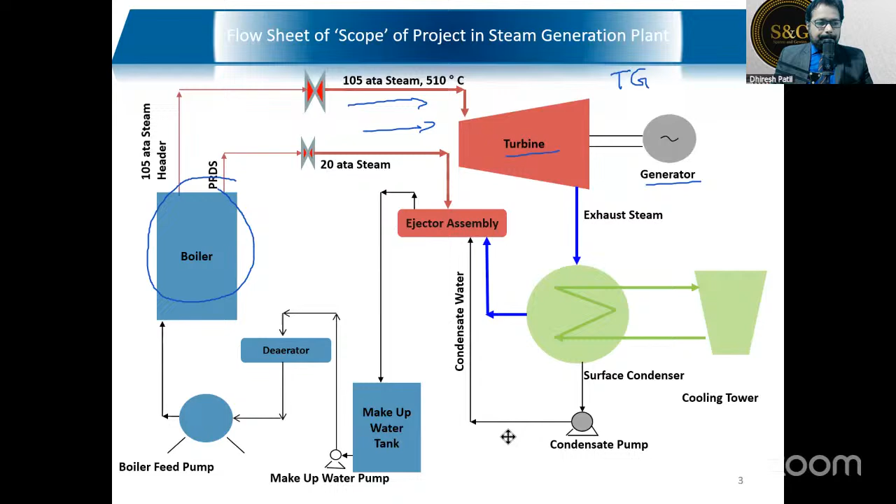Okay, now once you understand this, then we go to this. What is the tool? Now you got to see. You may not understand the main core domain specific knowledge, but you have to identify the tool. Okay everybody, what is the name of the tool? Type in the chat box.

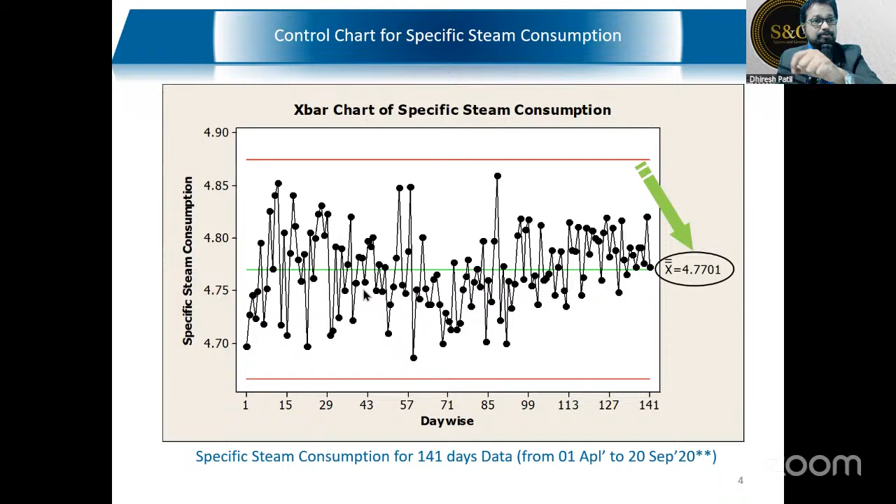Now, how did they get 4.77 metric ton? From this diagram, from this actual data. This is called the 4.77 average daily specific steam consumption. They have taken this data from there and defined their problem that 4.77 is the current specific steam consumption.

In this umbrella, they have selected this particular pie, which is the specific steam consumption of the turbo generator. So they have taken the target from 4.77 to 4.65. Are you clear till now? Just type yes in the chat box.

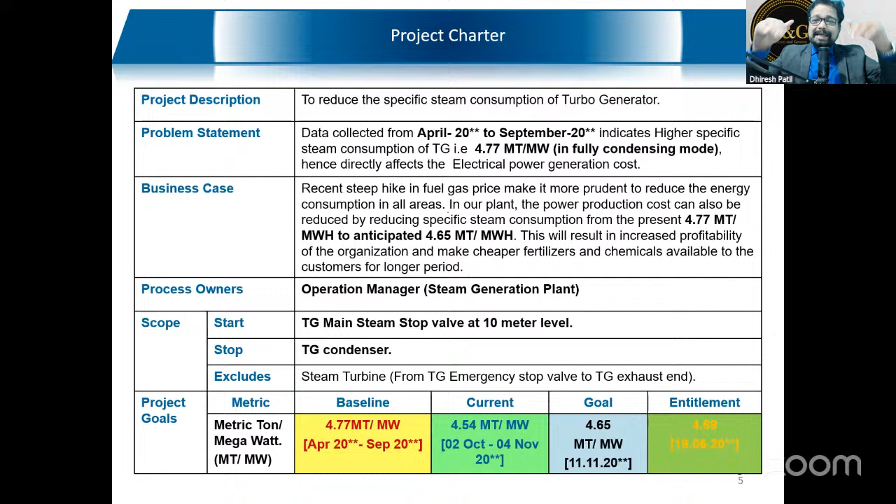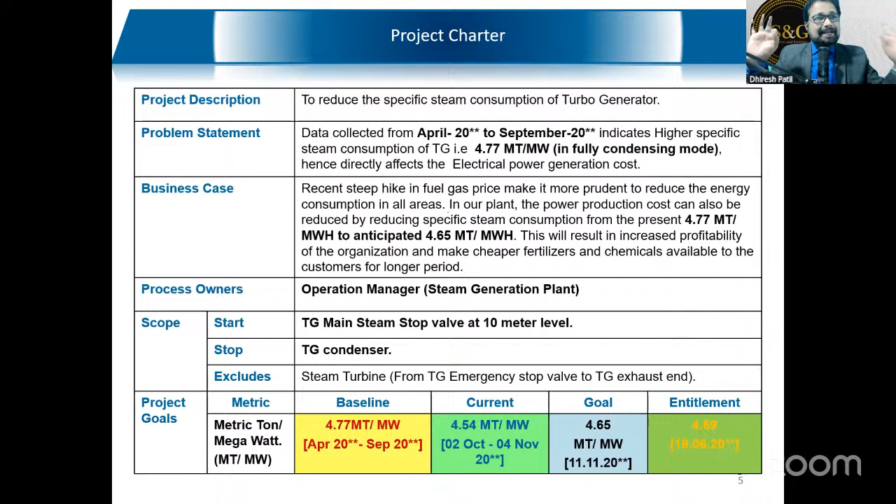We need not understand deeper into this. Just understand the tools, basic tools, and overall what project we are talking about here. That basic understanding is more than enough for us. Clear? Super. Now this is the potential saving of the project.

Now every project's potential saving has to be calculated on a per annum basis. Make a note of this. Write this down in your notepad. Any project's potential saving has to be calculated on a per annum basis, not per month basis etc. Not per quarter, not per month basis.

Clear? And this has to be validated from the finance head. Are you clear with these two points? So the potential saving has to be calculated in an annualized format per annum. Why? So that the top management can understand what is the cost for the project and what is the financial impact we are getting. Decision making becomes easier, resource allocation becomes easier, focus becomes easier.

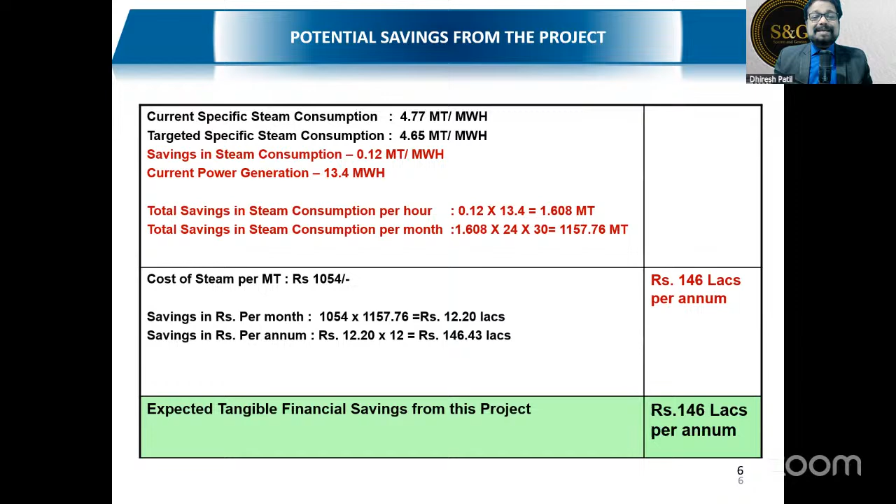Now in some cases, direct potential saving may not be possible, and that is okay. Every project may not be a cost saving project or there may not be some financial impact. I will speak about it. Now, what is this tool?

This is one of the most brilliant tools I have come across to gauge the engagement level of people, because it's a very tough job. You cannot gauge the engagement level of people because people speak something, but their actions speak something else, right? That's why this becomes very important for us to gauge the current engagement level of people.

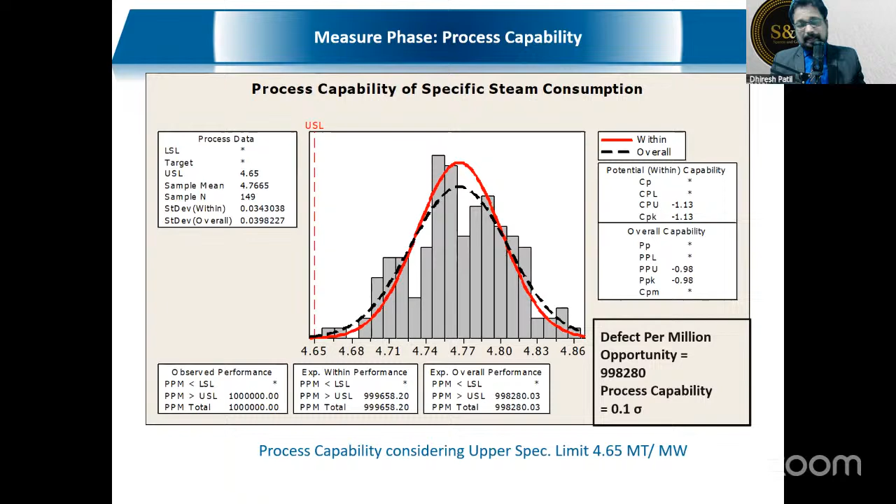So this is called process capability analysis. Then we go to the analyze phase. What is this tool called? Type in the chat box, everybody - what is this tool called? Very simple, it's fishbone analysis - man, machine, method, mother nature, material, measurement. All these are fishbone, Ishikawa, the 6 M's.

So why high specific steam consumption? These are various causes they have identified. This has been followed by why analysis, or root cause analysis. So this is a tabular format of why analysis, correct?

So let's say, for example, loss of heat through insulation. Why has there been loss of heat? Because of improper application of insulation material - while applying the material, it was not applied properly, so not good workmanship. Workmanship was not proper because the manpower is not trained enough to do this - so this is the root cause. Then deterioration of the insulation, no periodic inspection, no provision of checking points available - so point not provided is the root cause.

So these yellow colored ones are the root causes taken into the final column, which is called potential root cause. Clear, everybody? So this is called root cause analysis, RCA.

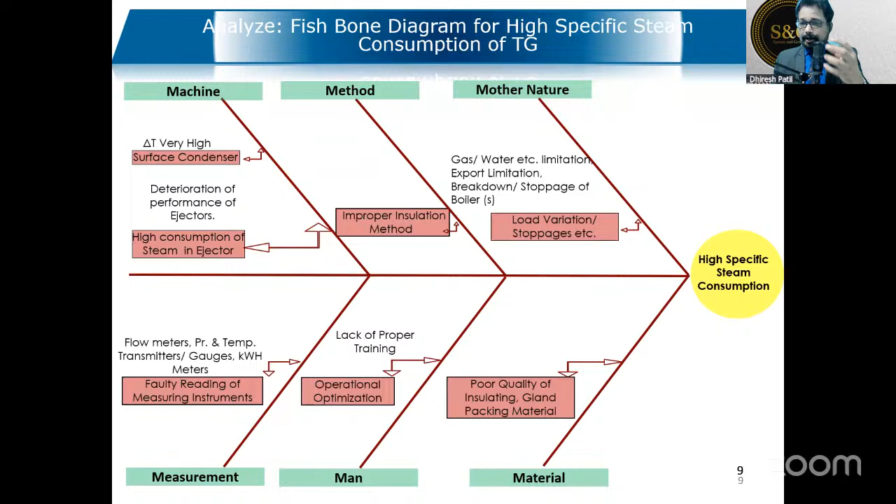Now, which phase are we in? Type in the chat box - which phase are we in? Type in the chat box everybody - which phase of DMAIC are we in?

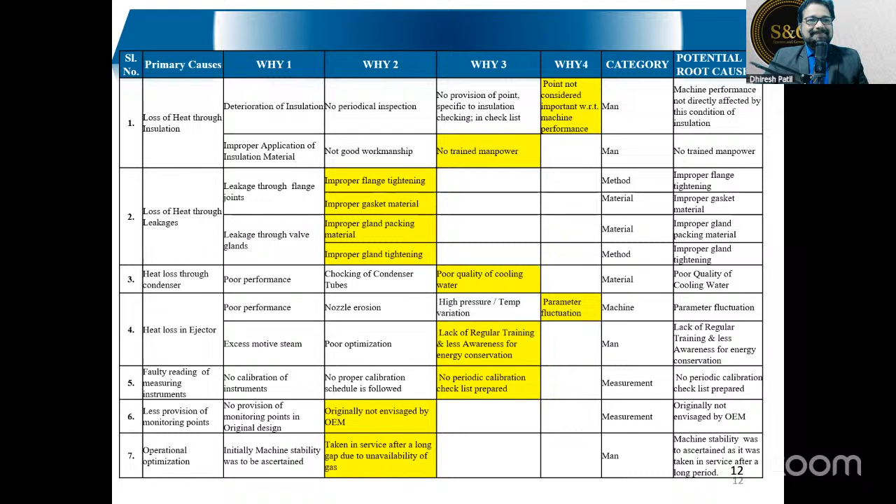Fantastic, so we are in the analyze phase. Every time you should remember which phase we are in. Project charter, we are in the define phase. Stakeholder analysis, we are in the define phase. Process capability analysis, we are in the measure phase. Fishbone analysis, root cause analysis, we are in the analyze phase. So we have to remember the sequence, and it will take some time for you to clear this.

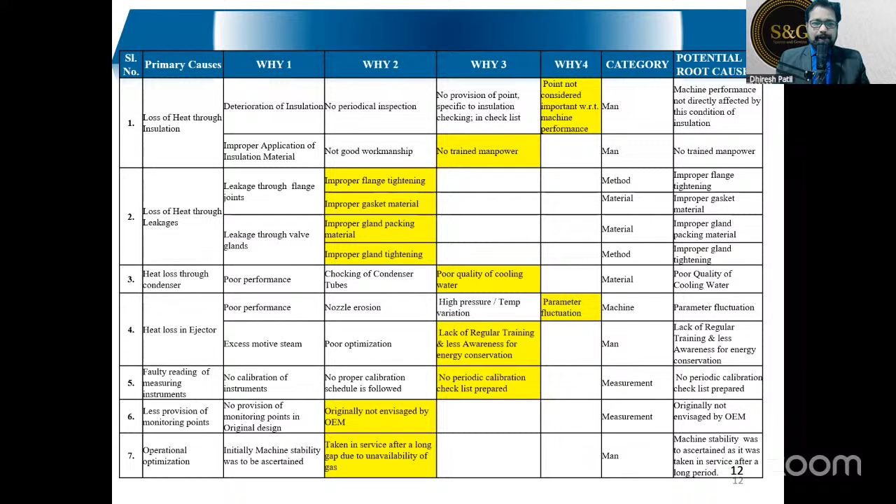Once this is clear completely, then you will be more confident about these tools. After the root cause analysis is done, there is something called root cause prioritization, where in this particular project they have done severity, occurrence, and detection. This is similar to something called FMEA, which is failure mode and effect analysis.

Everybody please type FMEA in the chat box. This is not actually FMEA, but it is based on a similar kind of FMEA program. FMEA, what is that? Let me write here. FMEA, which is failure mode and effect analysis.

Fantastic, very good. Now in this, you have severity, occurrence, and detection scoring, and then we have the RPN, which is risk priority number. We multiply these 3 scores, and whatever is the highest RPN, risk priority number, is our very top important most root causes on which we will identify the solutions. Clear? This is one way of identifying the priority solutions we have to find out.

So generally what we do is, any RPN number going beyond more than 125, we consider as a critical or important RPN number, and important cause. So those causes we have to find solutions for. What is the logic behind 125? It is a multiplication of 5 into 5 into 5, which is 125. So anything less than 125, we can consider fine. Anything above 125 is considered to be a risky root cause. This is called the root cause prioritization matrix.

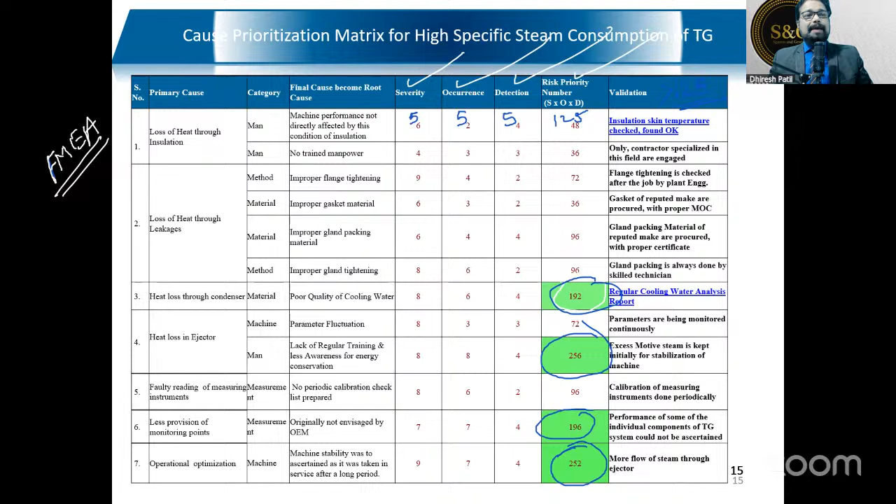Everybody with me till now? Just type yes. So see the sequence: first we have identified the project, then process flow diagram, PFD, we have made. Then we have collected the data in the control chart just to show what is the average. Then we have seen the project charter. Then we have seen the financial calculation.

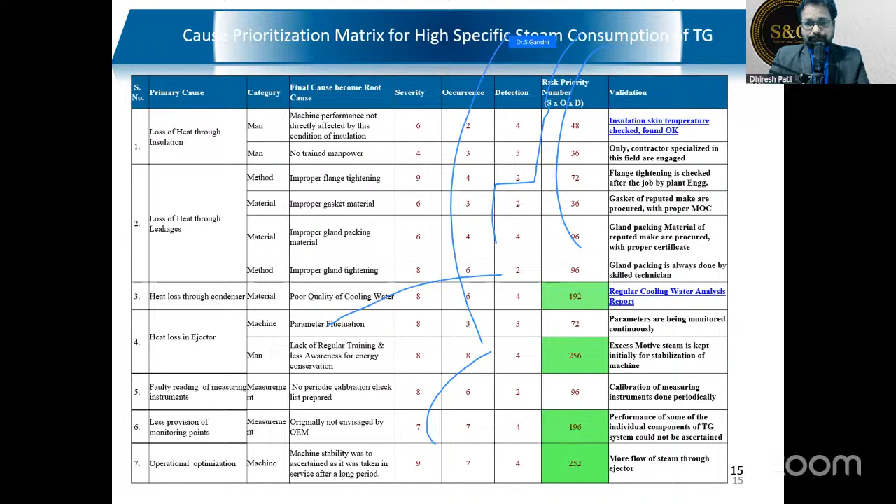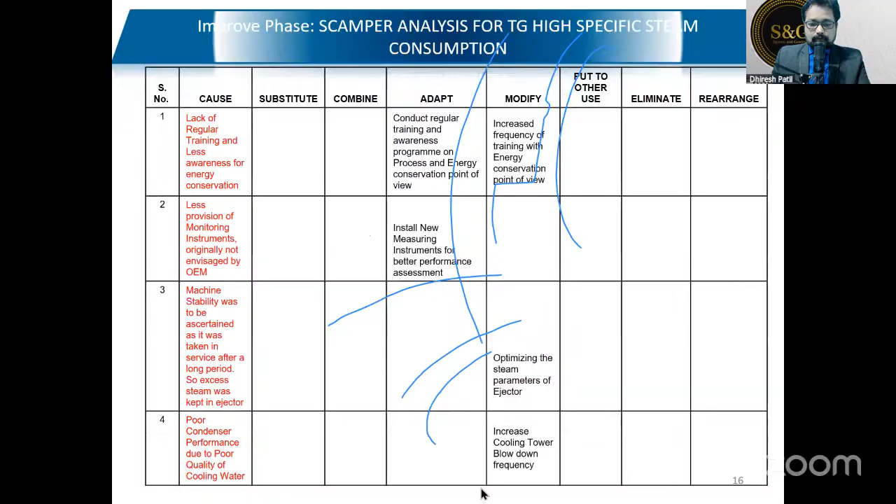After that, we have seen our process capability analysis, then fishbone, root cause analysis, then prioritization matrix. Once the prioritization matrix is done, then we come to the improve phase, right?

Now this is the tool we use, we have learned in the yellow belt as well. What is this called? Type in the chat box. Everybody, type in the chat box what this is called.

Scamper. Yeah, you can just take this. Scamper analysis. What is scamper? Substitute, combine, adapt, modify, put to other use, eliminate, and rearrange. So these are the 7 trigger words.

Once we have the top priority root causes with us, then we sit with the team and do brainstorming to find out the solutions. Now this is the old project, but you can take help of AI tools as well, which we now use everywhere. We can make use of ChatGPT and other tools to brainstorm along with us, so we can add our causes and let ChatGPT add its own causes as well. Then you can of course verify and decide which one to take, which one to eliminate.

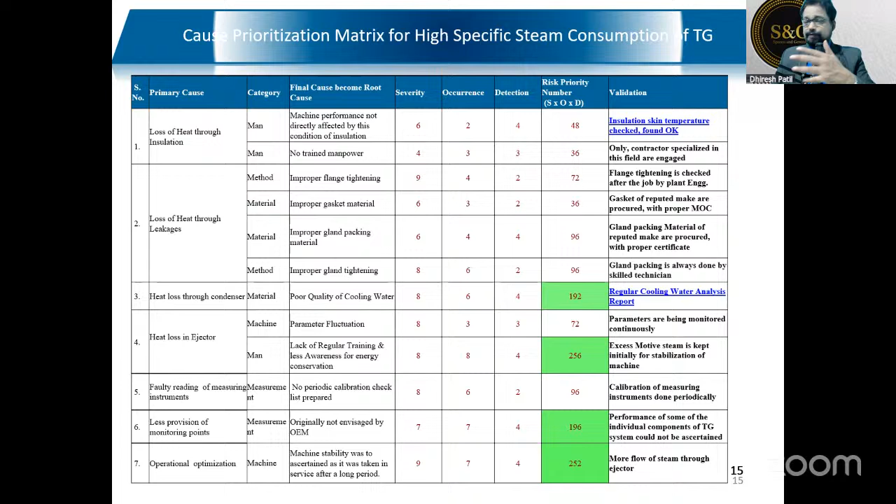So here it happens like this: all the causes are written in one column. Then the team will ask the question, can we substitute something to eliminate this cause? Then everybody will think about it for some time. If no solution is found, then we go to combine. Can we combine something with something?

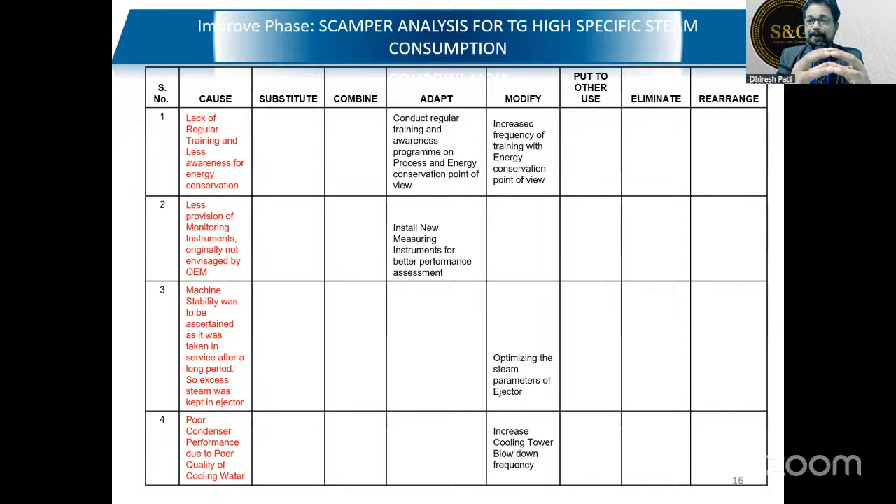For example, if you remember in the yellow belt section, I mentioned one root cause which is, I drive an SUV car which consumes a lot of my petrol, a lot of my fuel. So what can I combine? I can combine travel with 2 people. Rather than traveling alone, I can combine travel with 2 or 3 people, which will reduce my cost of travel. Then I can combine petrol with a CNG kit as well.

So that combination, so I can use CNG whenever possible - that is called combine. So these are the trigger words. Whatever comes to mind with those trigger words, those solutions we will find out. Here they have identified adapt, found some solutions, modify, found some solutions. For other ones, they have not found any solutions. It's okay, we have to go ahead. This way we can find out a lot of ideas and solutions. This is called scamper.

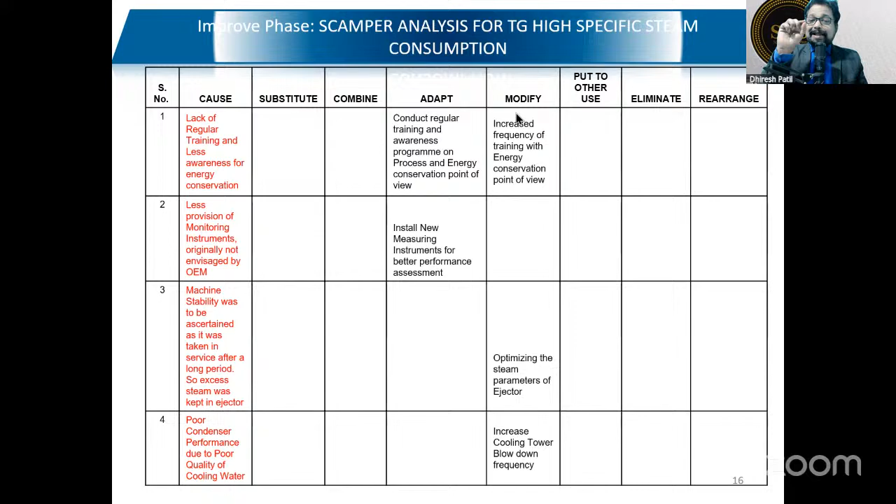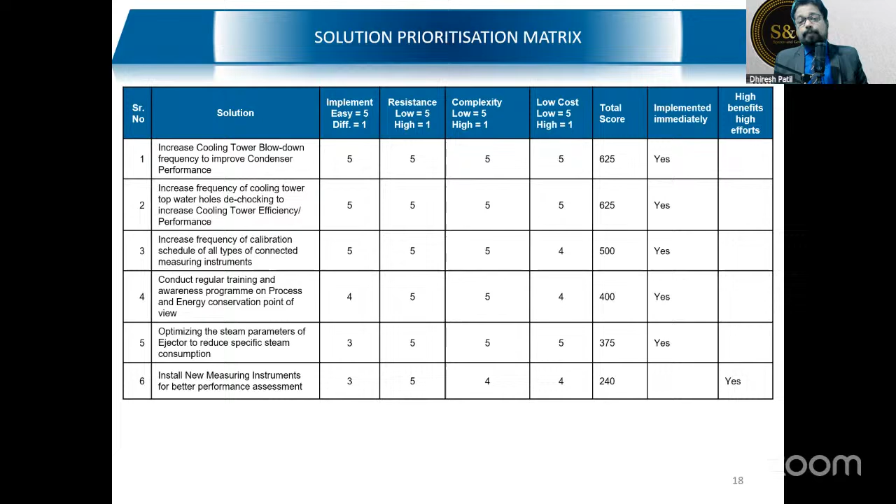Once we generate the ideas and solutions, then we go for similar kind of matrix. Earlier was the cause prioritization, now this is a solution prioritization matrix. There are 2 options we can consider - this option, and there is a second option called effort benefit analysis. The visuals are not very great, but effort benefit analysis is very simple yet very powerful.

In this, you have to identify and give high and low rating to those solutions. There are 4 quadrants we have to find out. On the x-axis there is effort, and on the y-axis there is benefit. One type of solutions are low effort and low benefit - this is that quadrant, LE meaning low effort and LB meaning low benefit. This upper quadrant is the second quadrant, which will be low effort and high benefit.

Low effort meaning effort to implement that solution - effort in case of time, resources, money, etc. It's called effort. And benefit to the project - if the benefit to the project is very high, then this will fall into this criteria.

I'll give you a simple example of low effort. Low effort meaning, let's say, giving 15 minutes awareness training to your team members - it's a low effort activity, not a very high effort activity. High effort activity would be something like automation of your entire process. That is a high effort activity because it will have capex, capital expenditure requirement. It will have a lot of timing, time requirement, resource requirement. So this is called high effort.

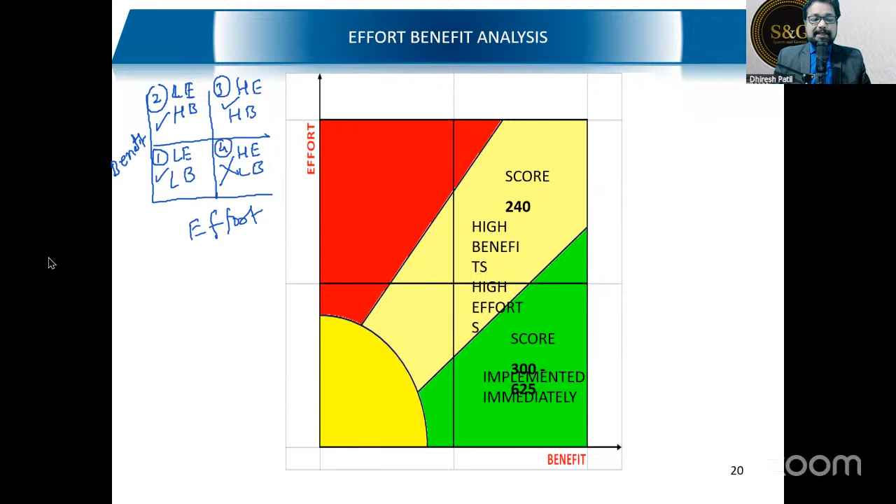So this is called effort benefit. What we have done is, first in the Scamper we generate the ideas, and in the effort benefit we prioritize those ideas and only select low effort low benefit, and low effort high benefit solutions. And then we make one action plan, solution action plan.

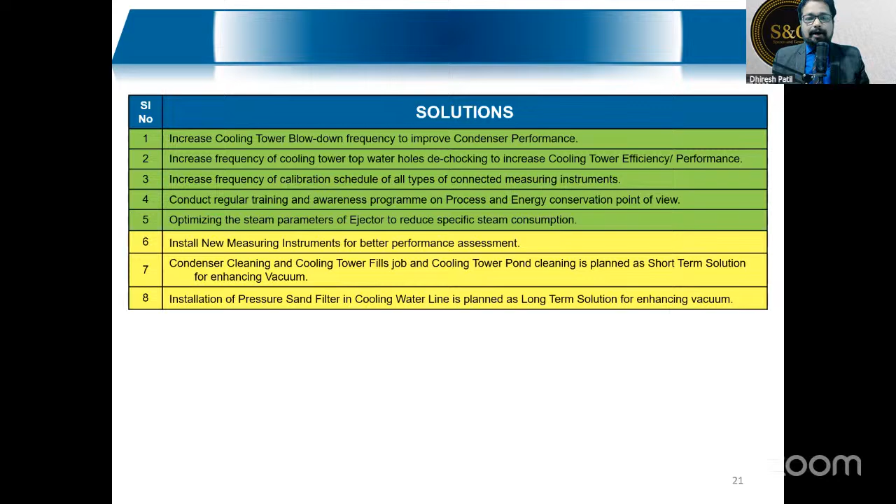Once the solutions are identified and finalized, then we convert those solutions into action plan, and then we decide who will implement it, who will take action, by when, and what is the status of that. Now some of the part has been masked over here - the names etc. have been masked because of confidentiality. Every solution will have multiple actions, and every action will have accountable person and a target timeline. This is called a solution action plan. So once we identify the solution, prioritize solution, make the action plan, and start implementing it.

Now this is a very important insight here. This comes at the last of the improve phase, which means in DMAIC, we are here at the end of the improve phase. Generally at the green belt level, this might take around 2 to 3 months time to reach here.

To reach this point, it might take 2 to 3 months sometimes. See, because at the green belt level, we are not full-time project people, we are part-time. That means along with our routine activity, we additionally have to drive these projects. Similarly, our project team members are also part-timers in these projects, so time allocation for this activity will be a little low. That's why it takes around 2 to 3 months.

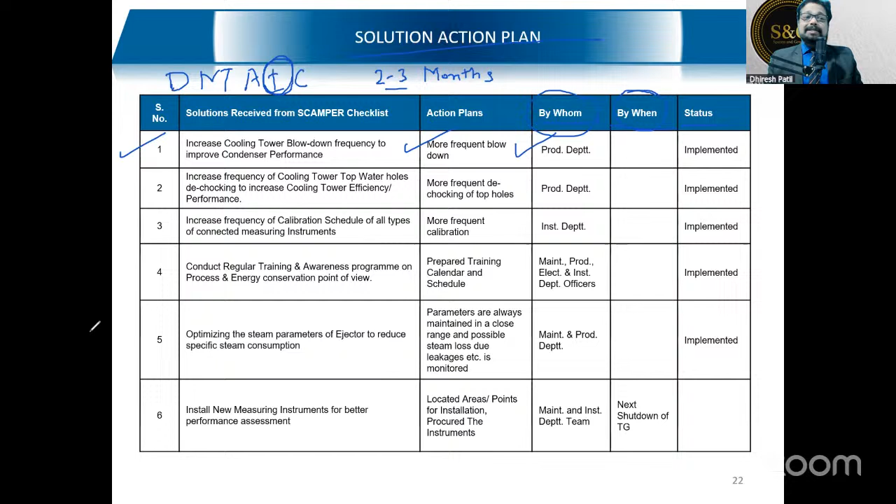So we have to be very clear in our mind, and the same has to be communicated to top management and other stakeholders and team members. Otherwise, people can start expecting results - we've started the Lean Six Sigma project, one month has happened but there is no progress, no result. So you have to explain to them that this will come only after the 4th phase. In the last phase, you can see the result.

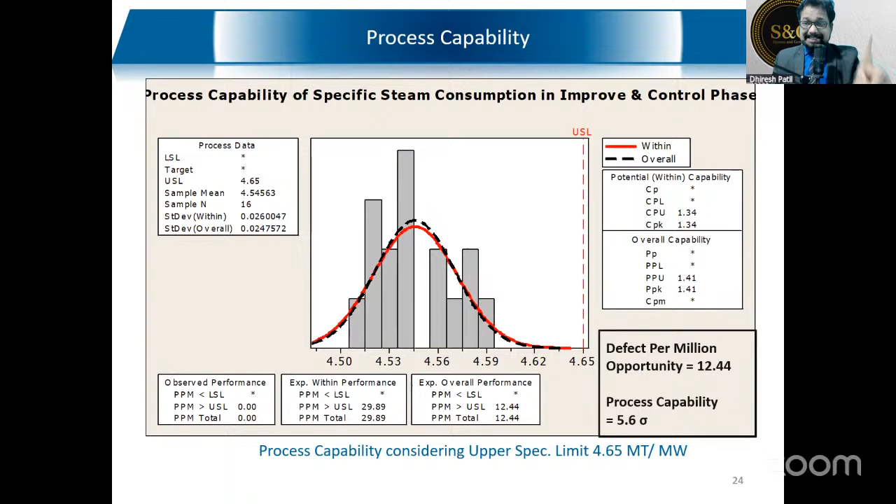So then after improvement also, we have to do the process capability analysis. The same thing we have done in the measure phase, we also do in the improve phase. This is also done in Minitab only, and I will show you how to do this. See, today's agenda is not to go into the tools because it will consume a lot of our time, but check last Saturday's session recording in the masterclass archive.

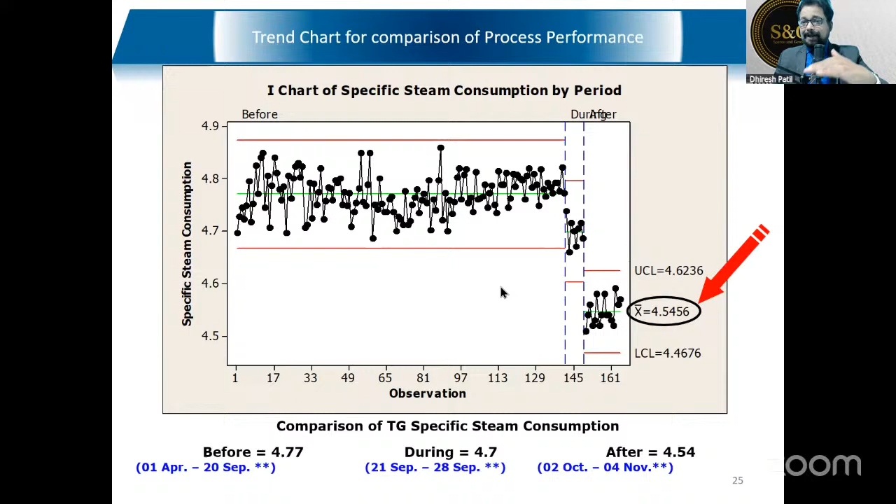Now, after this improvement has been achieved, in the control phase, the final phase, this is called the process management chart, or process control chart. Now in this case, we have to basically - if you remember, how many of you know this equation, remember this equation? Y is equal to function of X. Everybody remember this equation? Y is equal to function of X.

Everybody knows this? Just give me yes in the chat box. Anybody in the room who does not know this equation, let me know.

Your output is depending on your inputs. Y is your output and X is your input, right? Now in this case, once your Y is the specific steam consumption, your Y can be attrition, your Y can be downtime, your Y can be average call handling time. That is your Y, which is depending on all the X's, the causes basically.

Now, I always give the example of taste of tea is depending on quantity of sugar, quantity of milk, quantity of tea powder, quantity of water, etc. Now, in this process management chart, to maintain the taste of tea at that level, you have to very stringently monitor each and every factor. Understand this? So you have to monitor the quantity of milk, the quality of milk. You have to monitor the quantity of sugar, quality of sugar. You have to monitor the quality of tea powder, quantity of tea powder, and all those stuff which are important, which we have identified as criticals.

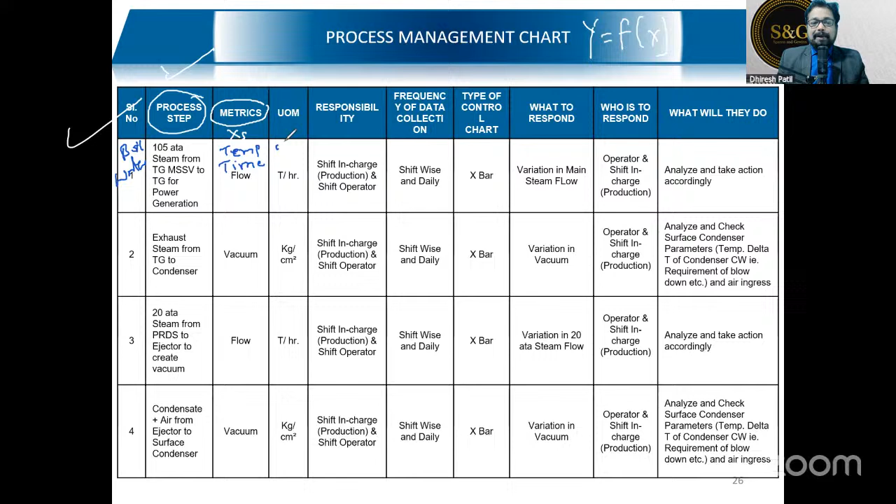And what is the unit of measurement for the tea making process? Let's say, for example, in the tea making process, the first step will be boiling the water. So I will write boil the water. Now, which metric will I measure? I will measure the temperature, and I will measure the time as well - how much time I have to boil, both I will monitor. So for temperature, degree centigrade will be the unit of measure. For time, it will be minutes.

And who will be the responsible person? Let's say Mahesh will be responsible, I'm just giving you an example. Frequency of data collection - for every batch. Whenever you are making a cup of tea, that way you have to monitor this. And which kind of control chart? Maybe you can use an I chart. In the control phase, there are 7 different types of control charts we learn. So you will understand what are the different types of control charts. Accordingly, you have to select this.

Now, if while monitoring you observe that the boiling is not done - let's say, for example, before making the tea, you have to boil the water for 5 minutes. If you observe that they are not boiling it for 5 minutes, then this is where you have to respond: if the time is less than 5 minutes, that is the response factor for you. The moment you observe that the boiling time is not maintained at 5 minutes, who will respond? Mahesh will immediately escalate to the supervisor, and then what the supervisor will do, you have to write down over here. So this is how this entire process management chart is made, and very stringently each and every factor is monitored, so that any small deviation can easily be captured, and we have to take action on it before it makes changes and chaos in the process.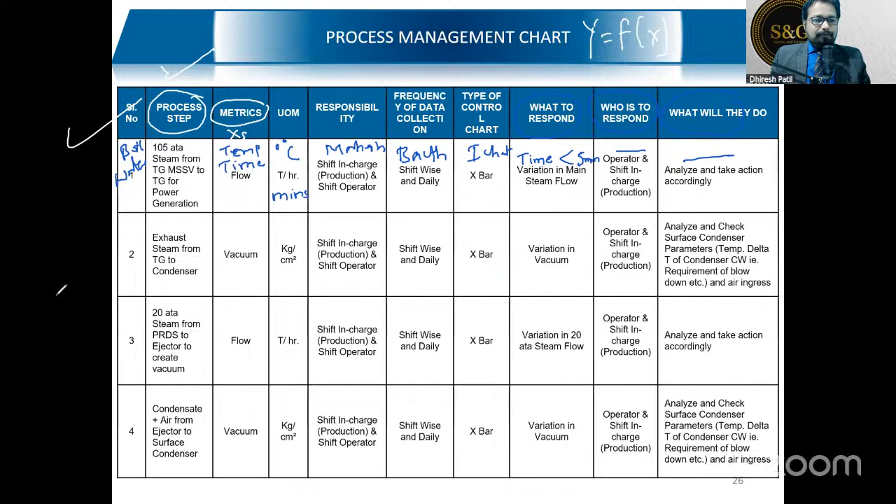Super clear, hai? Very good. Now in our regular practices also, we have incoming process quality check, right? Incoming material quality check. How many of you have this kind of system in your company? Just type me in the chat box. Yes, every company does it. What is that? It's the same thing, correct?

So before it enters into the process, you are checking the quality, quantity, everything, all the properties which are there exactly matching with the requirement. Otherwise, if you don't have the checkpoint, anything can enter inside and make chaos in the process, correct? GRN, quality analysis, everything of the raw material - all this is part of this kind of process management charts.

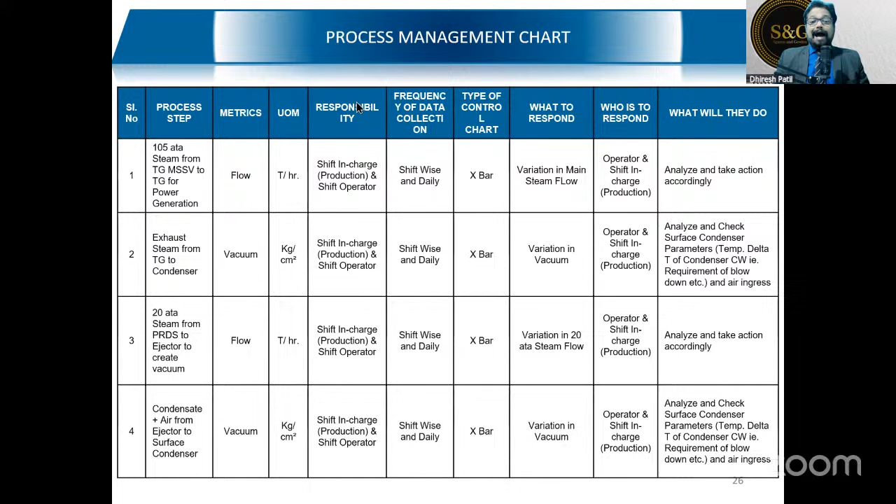Now, after that, they have calculated the actual saving. Earlier in the define phase, it was potential saving, and this is the actual saving. Remember I mentioned earlier that the baseline was 4.77 and the target was 4.66, something like that. But they have achieved 4.54 - they got reduced even further. So instead of 146 lakhs, they have almost doubled the saving. They have saved almost 2.8 crore rupees in a year. That is a fantastic, successful project.

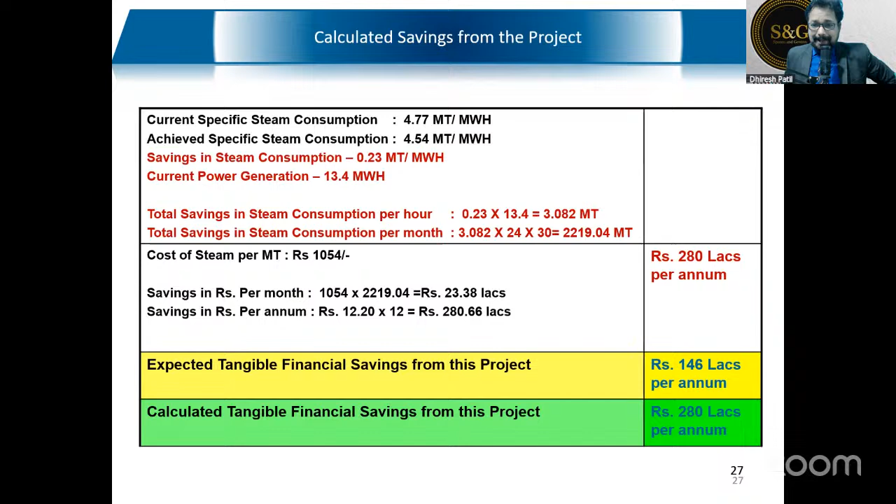So this is how, again, you have to validate this with the help of the finance head. Before validation, you should not present this - very simple formula. Without validation, you should not display any number. Understand this - if you display the number without validation, you are up for a big debate during the top management review meeting. So the validation signing off process is very, very important.

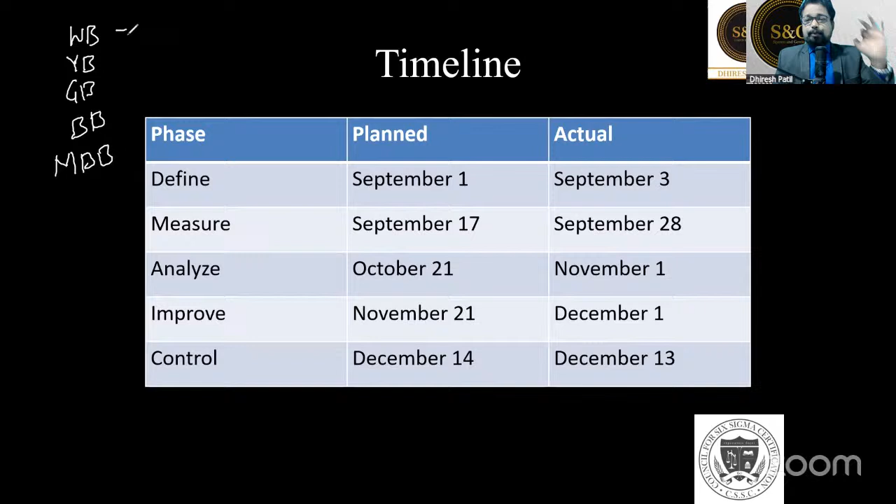Just for your understanding and reference, there are 5 levels in the Six Sigma belt hierarchy - white belt, yellow belt, green belt, black belt, and master black belt. Everybody knows this, correct? White belt is a pure awareness session, just awareness about Lean Six Sigma, that's it - they don't do projects. Yellow belt people can do small projects, generally within 1 month they have to deliver results. Green belt projects generally take 3 months to deliver results. Black belt projects generally take 4 to 6 months to deliver results.

Master black belt, again, they do not do projects on their own, but they are the mentors. Their role is to mentor yellow belt, green belt, and black belt - they give training, coaching, identify projects, and consult them. These are the roles of master black belt. So white belt don't do projects, master black belt don't do projects, and in between, yellow belt, green belt, and black belts do the projects.

And these timelines can further be broken down phase-wise: define phase, measure phase, analyze, improve, and control phase. Are you clear? Just type yes in the chat box if you're clear with this. So let's consider this as a green belt project, broken down into 3 months, broken down into certain areas. Clear?

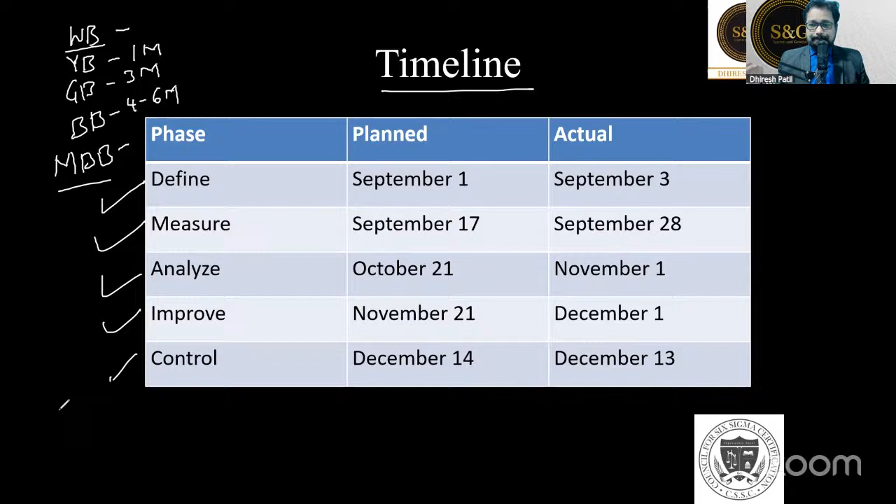Very good. Out of the phases, the analyze phase and the improve phase generally take more time.

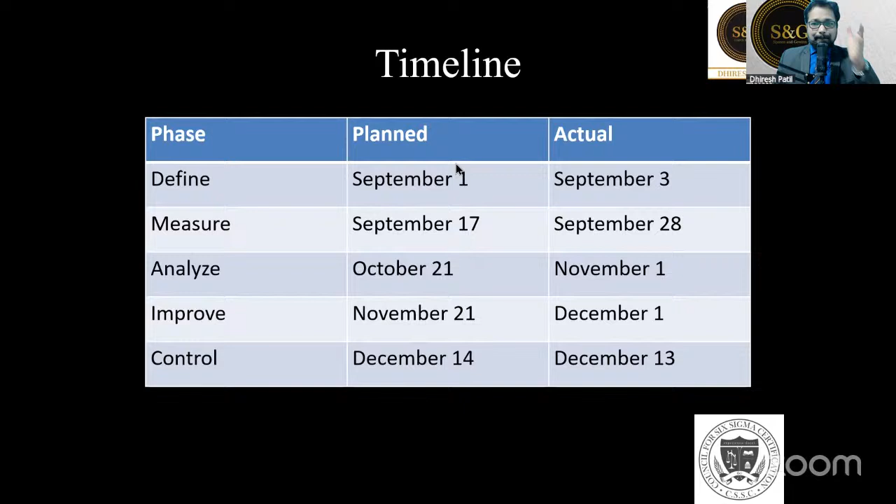December 13. So what does it mean? It means the planned date was December 14, but actually they started one day before, on December 13 itself. So the planning was to start on 14th of December, but they started working on the control phase one day earlier. For example, the improve phase, they wanted to start on November 21, but actually started on December 1st, so they delayed by 10 days. That's how planned and actual are compared.

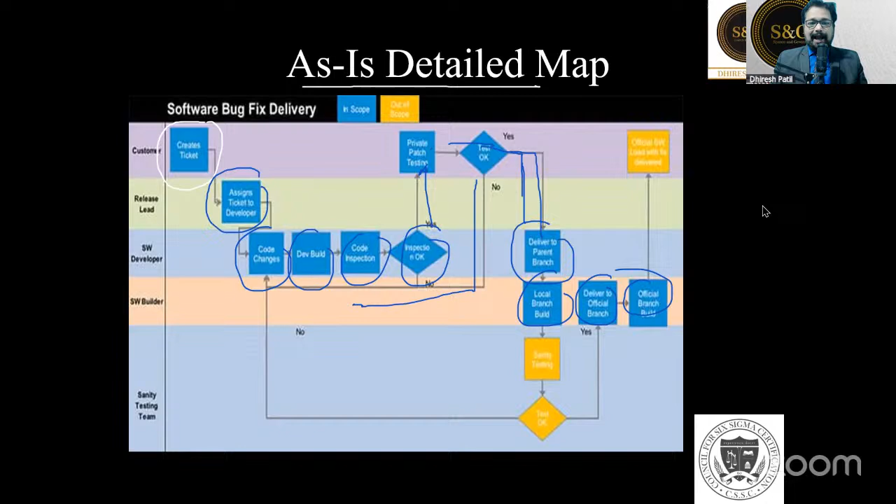That is something which can identify once we do the detailed as-is process map. Then we come to the measure phase.

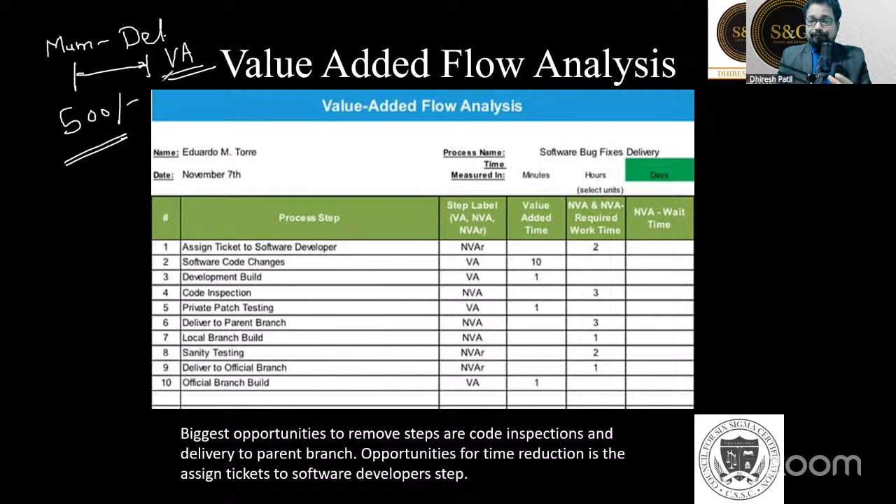It's called value added service. Okay, now,

What is non-value added? For example, they committed to deliver within 3 working days from Mumbai to Delhi. I said okay, but they delayed it by 7 days, and now my packet has reached after 10 days. So the delay is of 7 days, and this delay is non-value added.

Non-value added, if you remember TIMWOOD, we covered this in the yellow belt level as well - Transportation, Inventory, Motion, Waiting, correct? So in this case, it's a waiting waste. My customer is waiting, I'm also anxious about when my packet or product will reach there. So it's a waiting waste, correct? These are called non-value added activities where I will not be ready to pay.

Okay, so value added is clear, non-value added is clear. There is something called, in this case, NVAR - non-value added, R meaning required. Non-value added but required, or in some cases it is also called business value added. I'll give you an example of this.

Okay, if I'm sending this material by a container truck, now tell me, fueling that container or maintenance of that container - will I pay for the maintenance of the engine, maintenance of the tires, pressure, or the fueling, let's say diesel? Will I pay for the diesel? Will I pay for the maintenance charges?

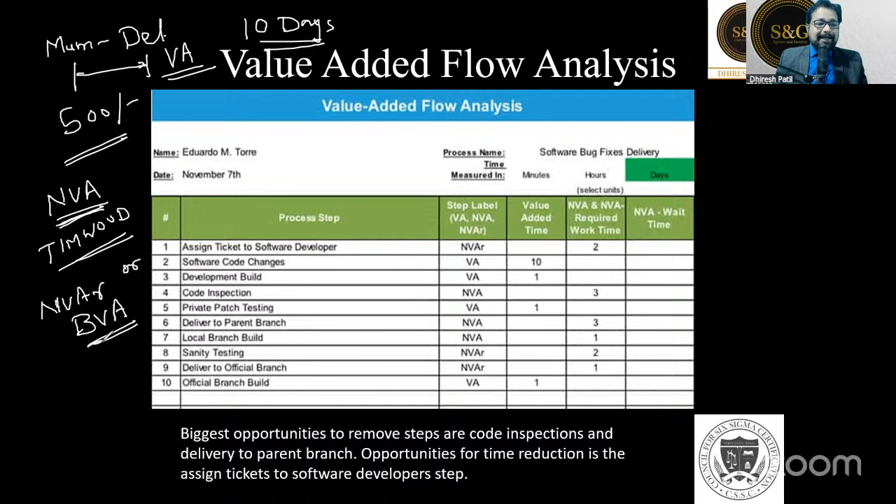Clear, everybody? Okay, so this is what they have done in this entire segment. They have first listed the process steps and identified whether it is value added or non-value added, and how much time it is taking in hours and minutes.

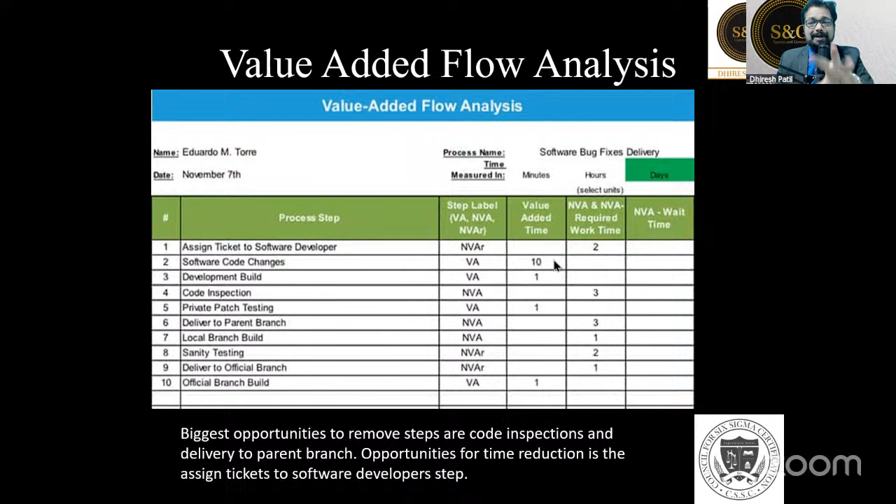Okay, how much time it's taking in hours and minutes, they have calculated that as well. Now this is called a box plot. In the green belt level, in the measure phase, you will understand what a box plot is. In short, I will explain you - a box plot is nothing but, now what they've done is list all the process steps, and they've divided the process steps into 4 major chunks. What are the 4 major chunks here? The first chunk is called ticket assigned lead time. So you can see this is a box plot.

Now in this case, the height of the box plot is basically defining the variation. Understand this - the center line of the box plot is nothing but the average. So you can consider the ticket assignment lead time, and you can see the scale - 0, 5, 10, 15 - these are the number of days actually. So ticket assignment on average is taking 2 days, you can see here 2 days. That's why you can see this box plot has very short variation - variation is not very high and the average is around 2 days.

Now coming to the second, this is the biggest chunk, which is taking 15 days time, and this is called ticket ready to submit lead time. You can see huge variation. The average is around 15 - here you can consider 15 is the average, but you can see the variation.

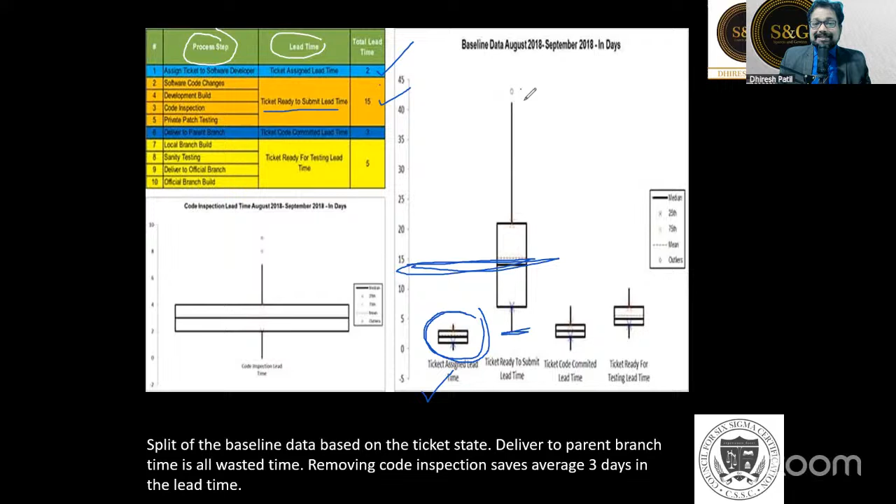Sometimes it takes around 2 days, but sometimes it is taking around 40, 42 days as well. Height is showing the variation of the process. So sometimes this activity is done in 2 days, but sometimes it is done in 40 days plus. So this is a very, very important activity to focus.

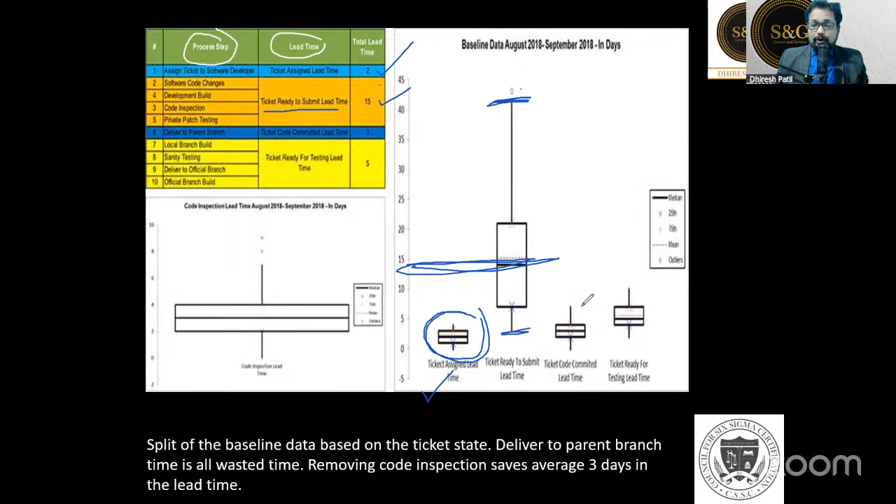Then the ticket code, again, the average is around 3, and variation is also low. And the fourth activity has an average around 5, with a medium kind of variation. But the second activity has got the maximum amount of variation and most amount of time requirement.

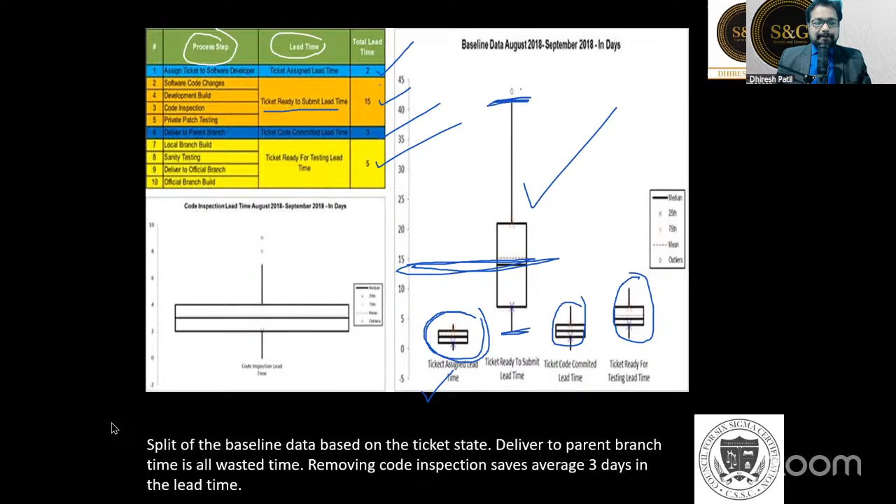Okay, then after this analysis is done, we go further into the improve phase. So they generally generate some solutions here. Potential solutions they have generated. Let me just see here. Now see, they have just given a very short presentation here. So the solutions they have generated through Scamper.

And now there is a different model of solution prioritization they have used. This is something which you have seen in the earlier project as well, or you can do effort benefit analysis as well in this solution prioritization.

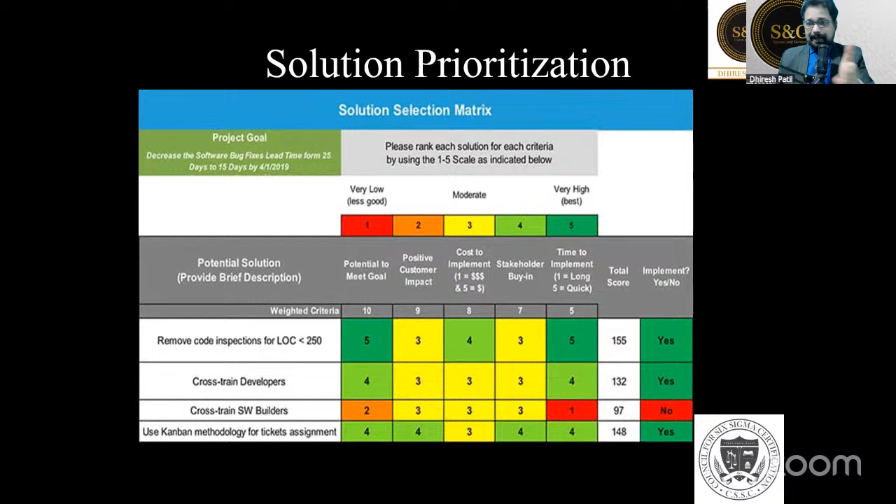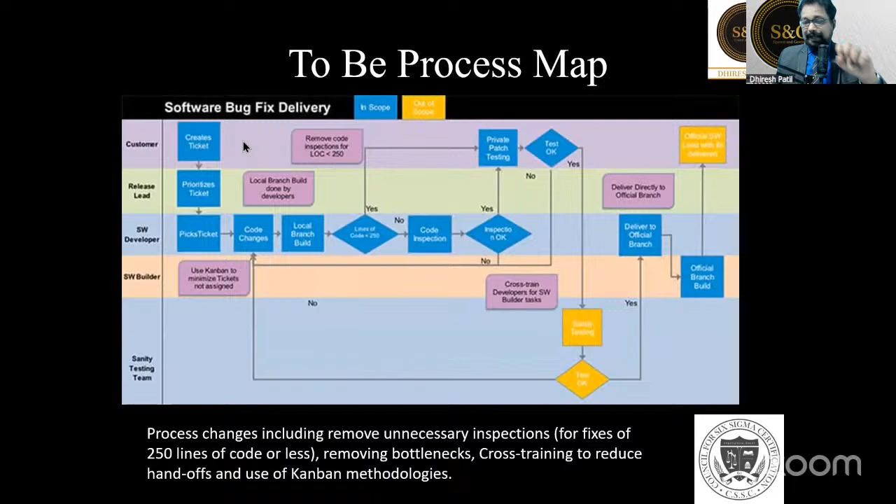Once solutions are prioritized, this is the to-be process map. So there are some kind of changes in the process you have done. Earlier was as-is, meaning jaisa hai vaisa process, and to-be meaning the improved version of the process map. So they have just suggested some modification in the process. This is the process map after improvement.

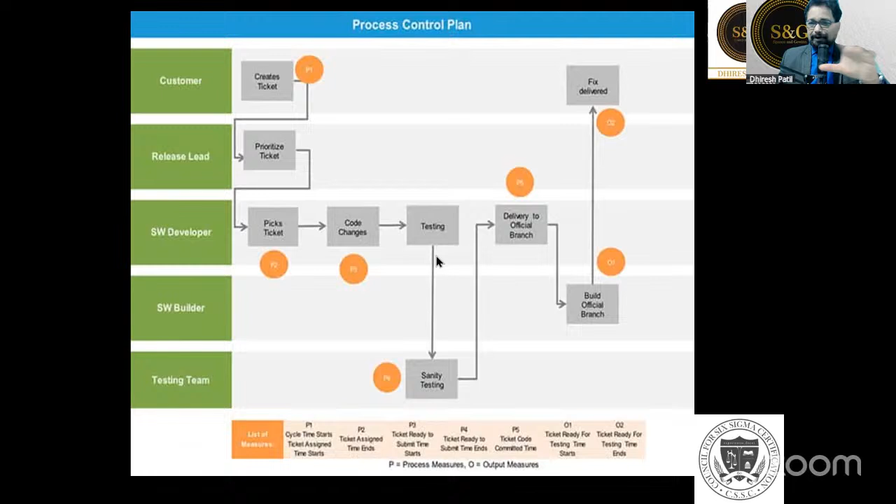So in the control phase, they have done the control chart, the control plan. It's a different kind of control plan. And this is the monitoring and response plan, which we have seen in the earlier project as well — who will monitor what and what kind of response they will take. This is what they have done.

And the project closure: what are the lessons learned, what is the impact on the customer, what is the final calculation. Effort saving was 46 man days or people month. So 46 people month they have saved, which saved around $384,000 in savings. This was the real project done with this.

I'll share this document with you so that you can go through that as well. Are you clear with this? A quick glimpse about a second IT project as well. The same kind of process flow we have also observed here.

So for KPMG, you have developed an R&D project for this. Fantastic, superb, great to know this. Are you clear with this? Fantastic. So I'm just open for the question answer.